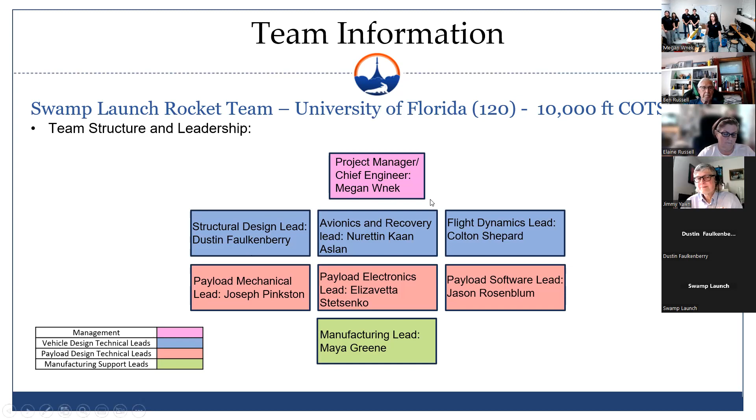So just an update before they start talking about where our team is at. We have, of course, submitted all of our progress reports and paid all our fees for competition and submitted the frequency allocation form. We have performed a test flight, and we are now completing our video conference. In terms of preparing for competition, we've coordinated our roster and our travel. We've secured our motor, and we're currently in the process of working on the technical report for submission.

So we're excited for all of that. And with that, I will pass it on to our technical leads to start talking through the project.

Hi, I'm Dustin, I'm the structural design lead for IREC. Just starting off with some basic dimensions and stats about the rocket. We chose to go with a single stage rocket for our design. It's a 6-inch diameter rocket, so it has an inner diameter of 6 inches and an outer of 6.14. We went with a 4-fin design. Our vehicle length is approximately 127 inches. Our vehicle weighs 42.2 pounds without the motor, and the vehicle weight with the motor is about 60 pounds.

For the airframe of the rocket, it's actually student research and designed carbon fiber that we made in-house. We made it using a 3-ply symmetric layup consisting of 2 3K biaxial carbon fiber sleeves with a middle ply of 12K unidirectional carbon fiber. We used Soller Composites 820 resin hardener system for our epoxy of choice. We conducted the whole thing on a polycarbonate mandrel, and then we wrapped the entire wet layup in a silicone PET tape in order to avoid sticking with the adhesive.

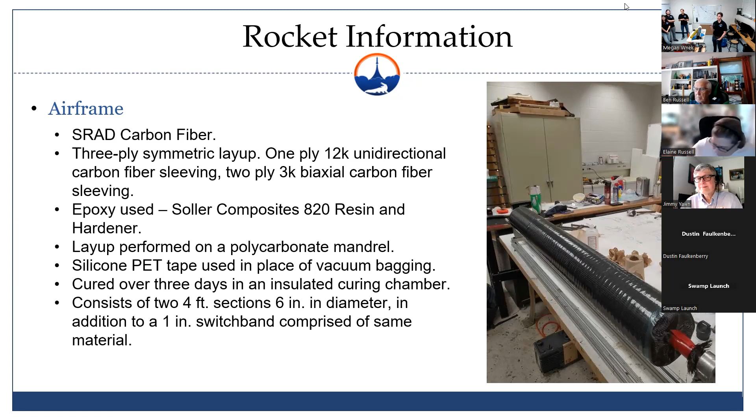For our nose cone, we just chose an off-the-shelf fiberglass nose cone. It has aluminum tips to improve flight stability by moving the CG a little forward and strengthening the nose cone. It is 6-inch diameter, we have it right over here. And it is a 5-to-1 von Karman, which we chose for ideal aerodynamic performance for flight regimes above 0.8 Mach.

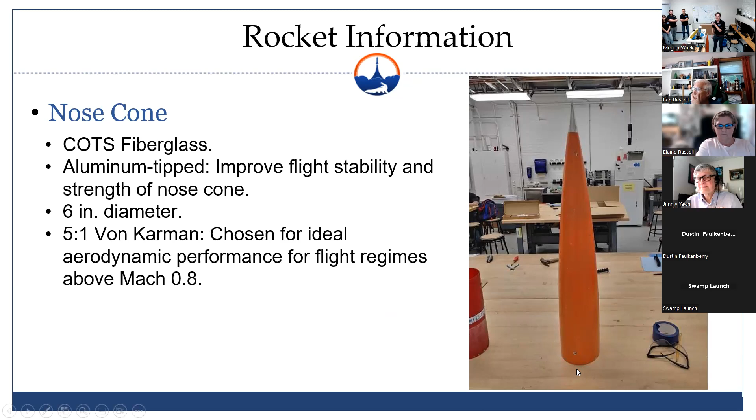And then we have the nose cone shoulder, which we have right here. This joins the nose cone and the forward airframe. It's also off-the-shelf fiberglass, 6-inch diameter, fits nicely inside of the nose cone and the forward airframe, 9 inches in length, and it's fastened via 4 nylon shear pins, which pass through the airframe.

Our avionics bay, which we have right over here and houses the avionics sled, joins the forward and aft airframes. It's also made of the same off-the-shelf fiberglass, 6 inches in diameter. It is 13 inches long and fastens via 3 plastic rivets to the forward airframe and to the aft airframe via 3 nylon shear pins.

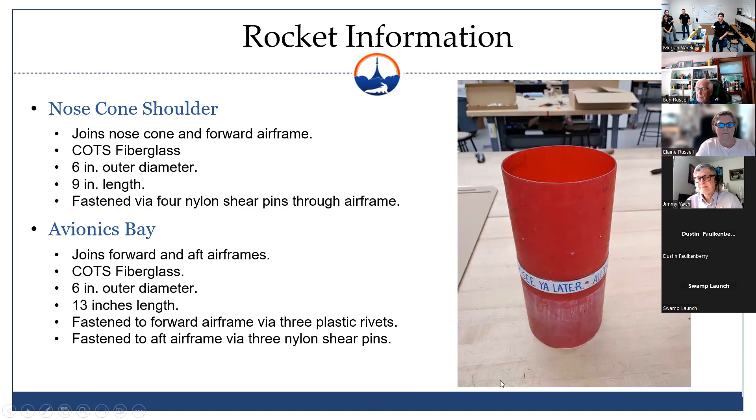Moving on to the forward bulkhead, which is situated right here inside of the previously mentioned nose cone shoulder. It seals the forward aft away from the nose cone. It serves as a point of attachment for the recovery harness via stainless steel eye bolts, which can be seen right there. It additionally serves as an attachment point for the GPS mount, which you can see right there on the slide. It is housed in the nose cone to avoid signal interference because the radio signals have issues passing through the carbon fiber airframe, so they need to sit inside of the nose cone to receive signals properly.

It is made of student research and design PVC, and we made it simply by turning it down on a manual lathe, boring out that center hole so that we could mount the GPS, which is a PET-G 3D printed part. We bored out the center hole and then parted it from the stock.

The avionics bay bulkheads seal between the avionics bay, keeping them from ejection gases. If you would like to hold that up so I can see it.

This seals the avionics bay from harmful ejection gases. It serves as the point of attachment for the recovery harness, once more via stainless steel eye bolts. It serves as a mount for the CO2 ejection system, which we'll elaborate more on later. It is student research and designed aluminum 6061, manufactured via turning down the size on a manual lathe, parting, and drilling the holes.

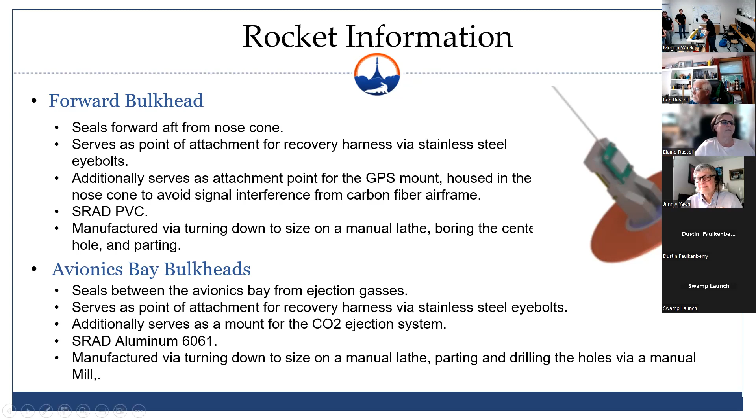And then our fins, which we have a couple of right here. These are student research and designed epoxy glass fins. We cut them ourselves on an abrasive water jet. We chose epoxy glass as our material of choice for its strength in both torsion and bending. It also has adequate strength to withstand impact on ground hit. We chose it over metal just for weight purposes because metal fins, whether aluminum or steel, would be much, much heavier than a composite fin, and overall improved stability as well.

We went with a 0.192 inch thickness for these fins, which was deemed adequate to withstand all flight loads, and it was cut from bulk sheet material, once more on a water jet. Four fins was chosen over a three-fin design for stability advantages.

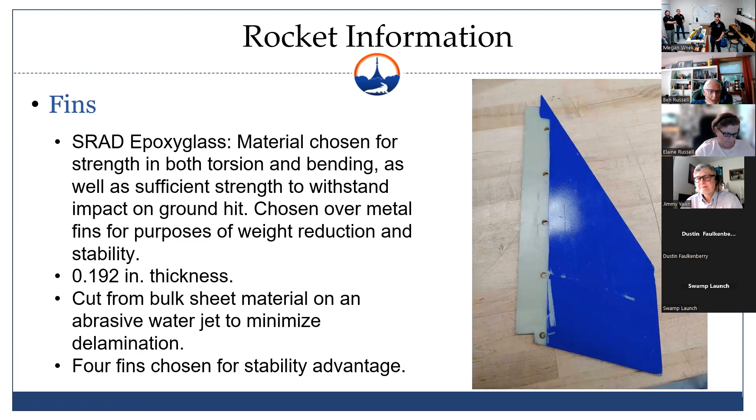All right, moving on to discuss the aft assembly, which was our initial concept for the design this year. Our main goal was to produce a design that could be easily disassembled and reassembled with no damage to the components. This is in contrast to a traditional epoxy aft, where everything is essentially secured during assembly, and once you have everything in place, nothing can really move.

It allows for easy design iteration post-assembly. If you need to change a part, you can. If you want to make any adjustments after the fact, you're not stuck with what you have. The components can be replaced in the event that they're damaged during launch or testing, and you can also reuse those components for a future project or for future vehicles.

The disadvantage that comes with that is higher manufacturing costs, because aluminum parts to be machined both cost more in terms of raw material and take more time to machine. There's also a potential weight disadvantage because you're going to have much, much more weight with this entire metal skeleton versus just wooden epoxy.

The fins are actually mounted via attachment to these two exterior fin brackets that you see here, that look just like this. You can see as they sit on the outside of the fin design, they are through the wall, so they pass through the fins and fasten via five alloy steel flathead screws. Each of the fins is also press fit into a radial slot in the centering rings, and then the brackets are fastened through the airframe to all of the centering rings once more via alloy steel fasteners.

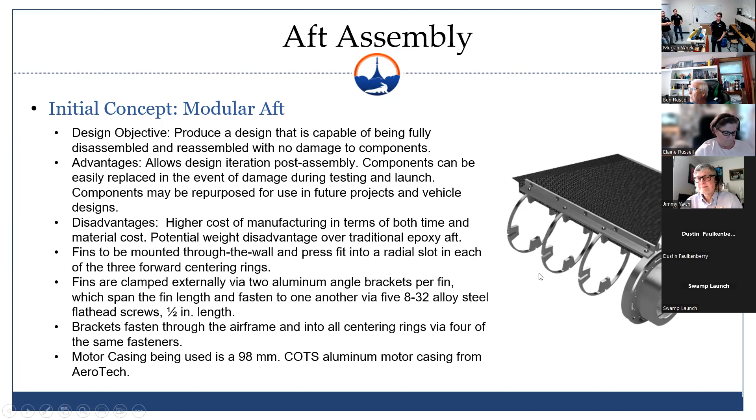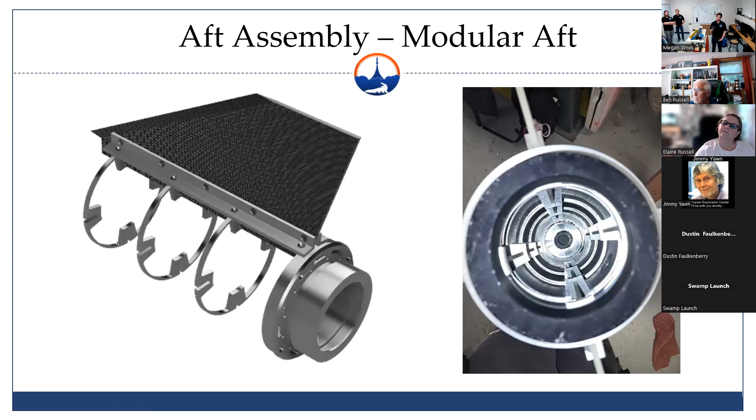The previously mentioned fin brackets are made of 6061 aluminum. Each bracket was machined on a CNC mill from a 13.5-inch bar stock, 1 by 1 inch. All the surfaces that were tangential to the airframe sat at an 8-degree angle from normal, so they had to be machined on a custom 3D printed fixture. All of the brackets came out to 13.25 inches after machining.

For the left brackets, there were simply 5 countersunk holes that allowed the left bracket to fasten to the right. The right had the threaded holes, which allowed it to be secured.

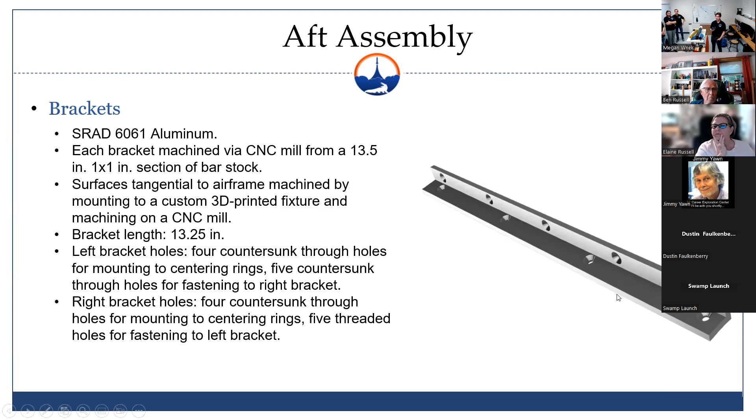The centering rings are Student Research and Design 6061 aluminum. They were manufactured by cutting bulk 1/4-inch thick plate on abrasive water jet to get the overall geometry, and then to make each of the exterior threaded holes, they were machined manually on a rotary chuck.

There are 4 centering rings in total. The aftmost one, which sits on the back and fastens to the thrust plate, differs from the other 3 in that it omits the fin slots in favor of 4 threaded holes.

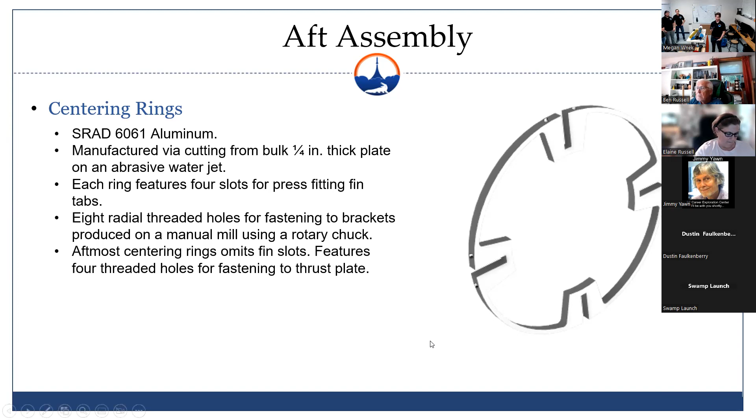The thrust plate and motor retainer subassembly was a Student Research and Designed in-house aluminum design consisting of the thrust plate, an off-the-shelf motor retainer from Aeropack, the 6061 aft centering rings, 12 stainless steel button head screws, and 4 stainless steel flathead screws, which were longer and fastened the aft centering ring. That is this subassembly that you see right here.

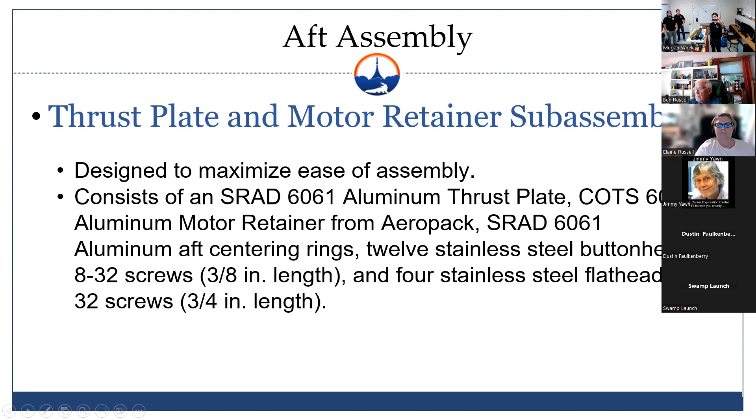For the thrust plate, we chose to make it once more out of 6061 aluminum. We cut it from a bulk 1/2-inch plate to get the overall geometry and then machined the detailed features on a CNC mill. It features a 6-inch diameter shoulder for mounting into the aft airframe.

The entire design slides very nicely into the back end of the rocket and then sits there. It features a recessed pocket to easily align the motor retainer, as can be seen right here, the motor retainer actually fits very cleanly into a pocket there, which makes assembly quite simple.

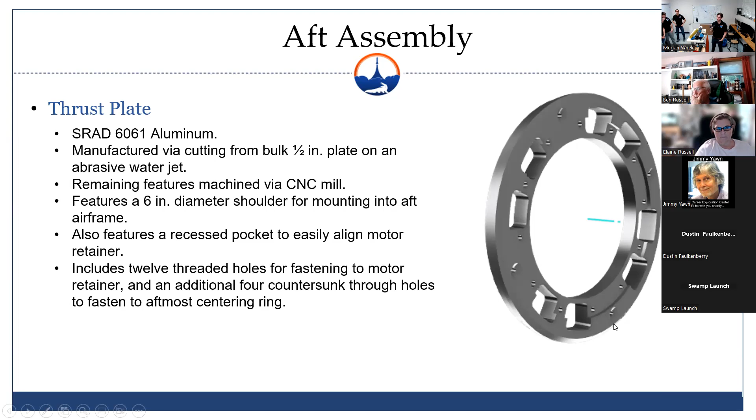It has 12 threaded holes for fastening the motor retainer to the thrust plate itself, an additional 4 to fasten the thrust plate to the aftmost centering ring.

Now, this entire aft concept that we were initially going to use for the competition vehicle was tested during test flight and experienced material failure. We are still investigating the potential modes of failure that occurred and developing a narrative to figure out exactly what happened. At the moment, though, we are choosing to rebuild our aft with a new concept, going with a traditional epoxy aft design.

The fins from the initial concept are reused because they didn't sustain any damage during the test launch. The aluminum brackets and centering rings are omitted in favor of epoxy glass rings, which we mounted via epoxy to the airframe and motor tube.

The aftmost centering ring is no longer aluminum. It is now made of 1/2-inch thick wood. And the epoxy fillets are used to mount the fins to the airframe in place of the existing metal brackets.

The design now features a motor tube, which our initial design did not have, that is 4.02 inches in outer diameter, made from G12 fiberglass. The thrust plate and motor retainer also did not sustain any damage during the test flight, and so those will be repurposed. I'm now going to pass it off to Colton, our flight dynamics lead.

I'm Colton, the flight dynamics lead. The motor we decided to choose was a commercial off-the-shelf Aerotech M2500 motor with an average thrust of 2,500 newtons, a total impulse of 10,240 newtons, and a burn time of 3.9 seconds.

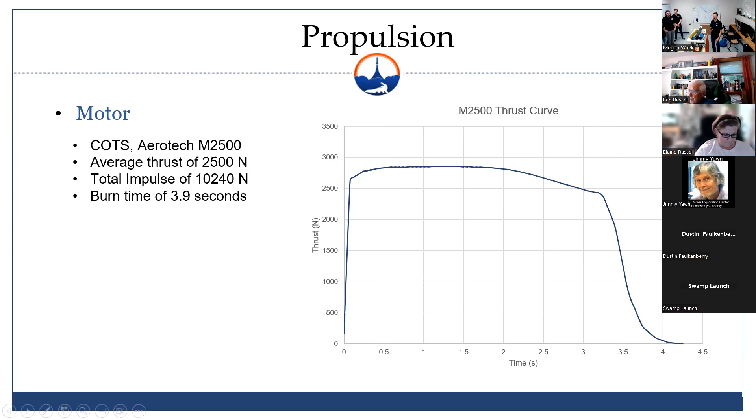We ran some flight simulations for the modular aft rocket design using the latest OpenRocket software that came out to an apogee of 10,180 feet, a velocity off rail of 104 feet per second, a thrust to weight ratio of 7.8, max velocity of 1,037 feet per second, a max acceleration of 335 feet per second squared, a static margin of 2.7, and using a ballast mass of 1.5. We have plots of position, velocity, and acceleration throughout the flight plotted for you.

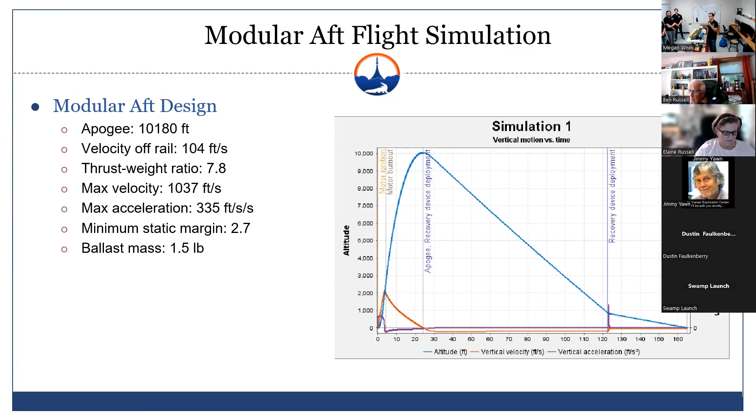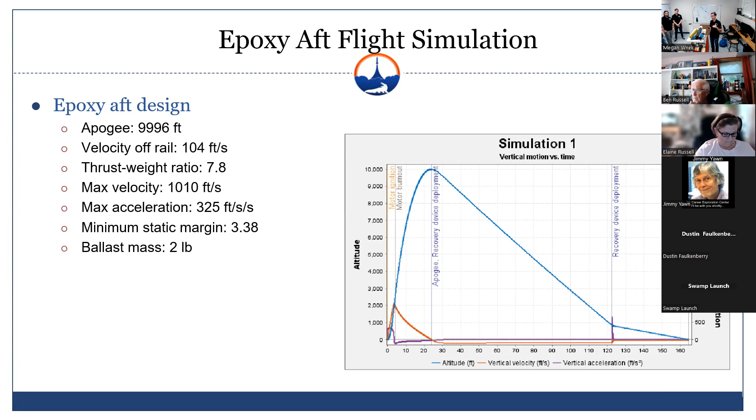Again, the position, velocity, and acceleration for the flight are pictured, and the next slide is a plot of the stability throughout the flight.

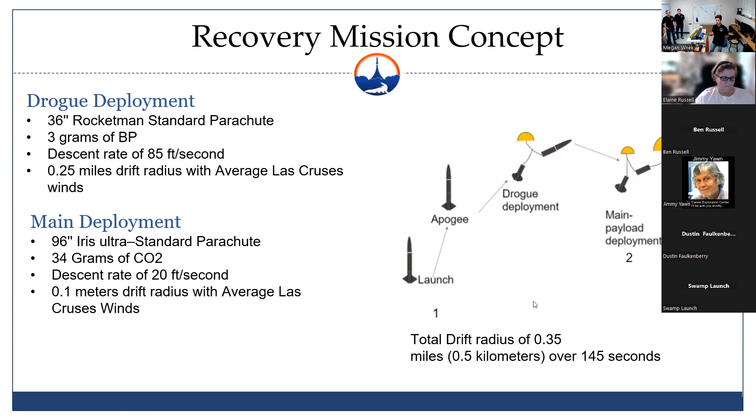The CO2 ejection system was student designed and researched, and the initial idea was found through looking at different off-the-shelf available CO2 ejection systems, and the system that we chose to build is...

All these components were machined out of bar stock aluminum 6061, and the CO2 ejection assembly is mounted on the avionics bay bulkheads, facing towards the forward section of the rocket since they deploy the main parachute and the payload.

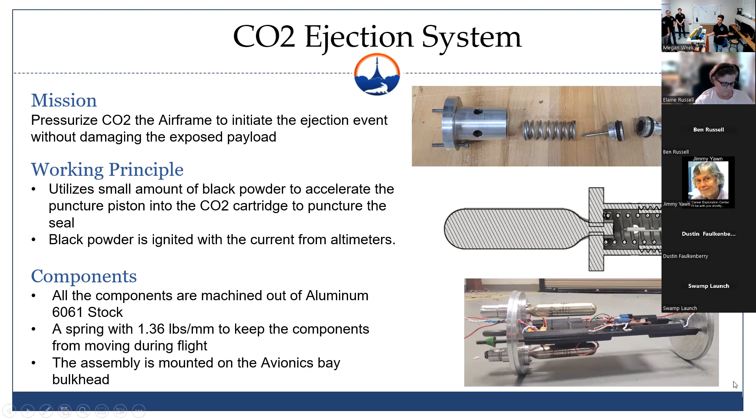The GPS that we're using to track our rocket after launch is a TeleGPS. It's located, like Dustin mentioned earlier, inside the fiberglass nose cone. It uses a 70 centimeter transmitter with 10 milliwatts of radio frequency output. We're going to be using 434.750 megahertz as our frequency. This GPS is powered by a 3.7 volt LiPo battery.

We receive the radio frequency from the GPS through a TeleDongle antenna, which connects to a computer and matches this frequency as the GPS. Using the manufacturer application provided to us, we can track the rocket and find its location on the map, and we can get the coordinates as well.

So far, before having our test launch, we've tested all the recovery events. First we tested the flight computers, where we tested functionality using the manufacturer's software, where we fired the drogue charge and the main charge, but instead of having black powder charges at the end, we connected LED lights to see if they were going to light up, and everything worked out.

After that, we tested the CO2 ejection system outside of the rocket before we actually put it together, to see if it was going to puncture the cartridges reliably and how much black powder it needed.

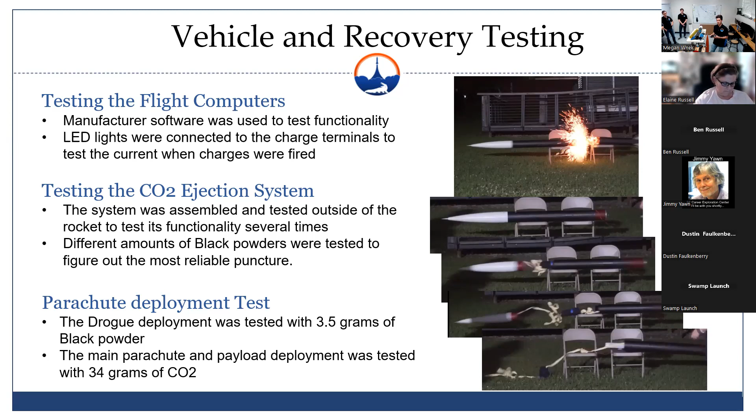Hi, I'm Jason Rosenblum, the payload software lead. Our payload this year is an autonomous quadcopter, which will be aerially deployed after the main ejection. Its goal is to take images of the launch vehicle's landing site after it's landed.

It's powered by a 4,000 milliamp hour LiPo battery. Its main sensors are a GPS, inertial measurement unit, barometer, and an ultrasonic sensor. It communicates with a ground station using an XBee Pro S3B.

It's made out of student researched and designed carbon fiber custom layups for both the frame and motor arms. The payload has 2 GPSs: one on the quadcopter itself, a U-Blox Max M8Q, which uses the XBee Pro S3B 900 megahertz frequency to send coordinates back to the ground station.

And the parachute has its own GPS, which is an off-the-shelf Big Red Bee 900 megahertz unit.

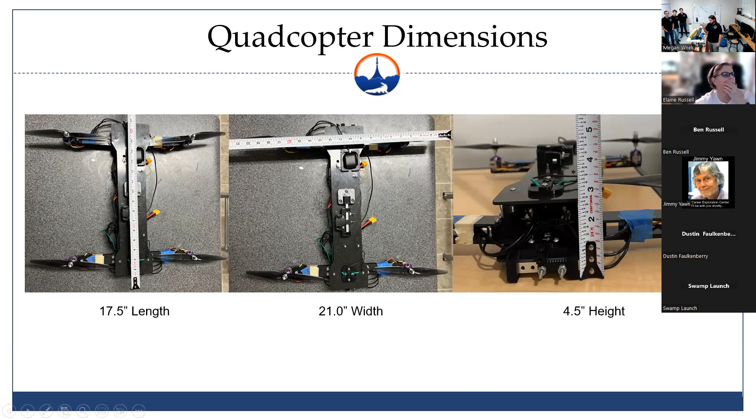As Jason mentioned, the main structural components for the quadcopter are the top and bottom frame and the arms that connect the propeller motors to the quadcopter frame. These components are all student researched and designed carbon fiber.

We used a 12-ply prepreg symmetric layup, which was vacuum bagged and cured in an oven over a 4-hour cycle. The components were then cut from this layup on an Omax water jet. These are pictures of the components when they came off the water jet.

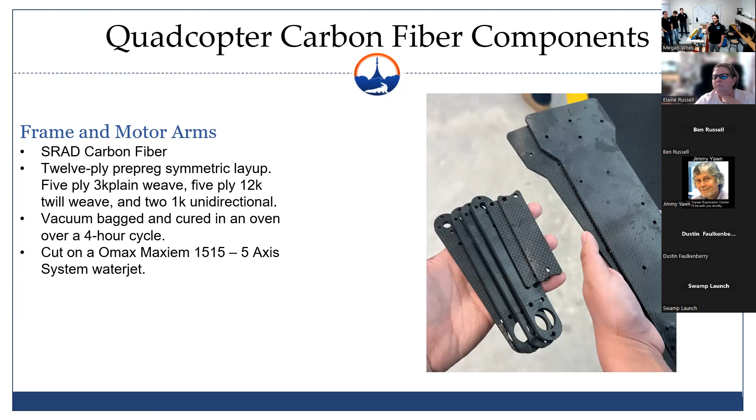For the quadcopter mechanical components, as mentioned before, the arms are able to be folded inwards for flight configuration. This happens through the unfolding mechanisms located at the 4 corners of the quadcopter frame, which connect the propeller arm motors to the actual quadcopter frame.

These unfolding mechanisms each have a 180-degree torsion spring, a pin-plunger locking mechanism, 2 nylon thrust bearings to help carry the load to the frame itself, and a pivot housing, pin chamber, and hard stop, all of which are 3D printed using PETG filament.

The arms are able to be folded inwards using the pin-plunger system, so when you pull the pin, the arm can fold inwards, and after releasing the arms during deployment, they snap open, allowing the drone to begin its flight configuration.

We also have, on either end of the quadcopter, the container deployment rack and pinion system. These are located at both ends of the quadcopter and allow it to be deployed from the container, which will be discussed later in the retention system section. Each has a DC motor driven rack and pinion system, with an aluminum beam to help carry the load, a steel pinion, and an acetal rack.

When these rack and pinion systems are actuated, they experience a 2-pound load. These were tested and were able to open and actuate under 8-pound loading, and they were also utilized during the test flight.

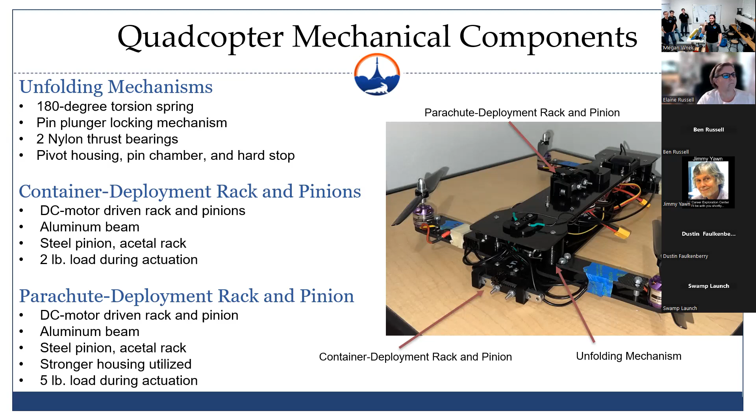Additionally, we have an ultrasonic sensor mounted externally with line of sight to the ground that can help detect landing of the drone, and an active buzzer to confirm proper working of all the electronics.

We have an XBee RF module which will communicate with a ground station and send back coordinates of the drone. We also have 3 DC motors for deployment, which are external, and an external button to arm all the electronics from outside.

The microprocessor we chose was the Raspberry Pi Zero 2W because of its small form factor and compatibility with the project. We also have an electronic speed controller used to control 4 brushless 1300 kV motors, chosen because they could provide the drone with a 2-to-1 thrust to weight ratio, needed for it to be stable and sustain itself during flight.

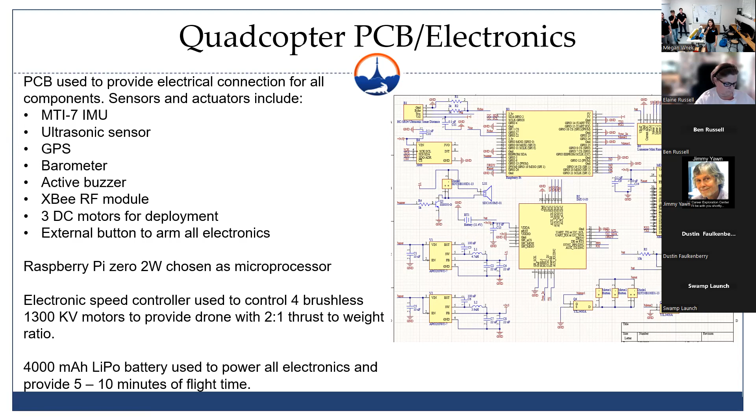At an altitude of 600 feet, the quadcopter will be deployed from the container and descend under its 12-inch parachute. During this time, the quadcopter will run system checks to ensure all software is operating nominally. Once we have given the manual go-ahead, the quadcopter will release from its 12-inch parachute and begin its flight operations.

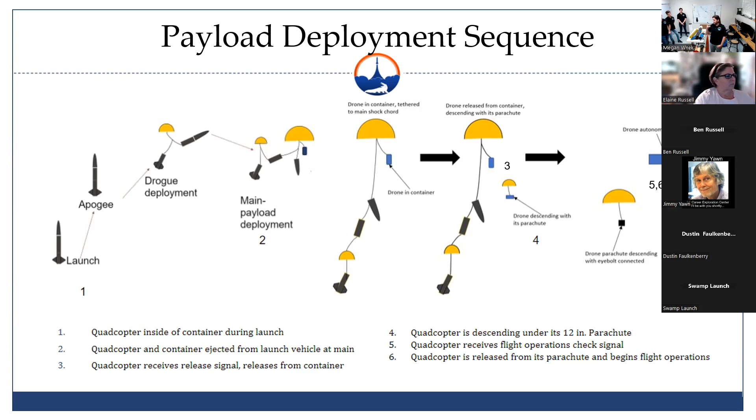This is a flow chart of the steps the software goes through during flight. First, once the payload is armed on the launch pad, the IMU will wait for acceleration to determine launch. Once launch is detected, using both simulation timing and barometer data, it will look for the main ejection. Once that ejection is detected, it will use barometer and GPS altitudes to release from the container at approximately 600 to 700 feet after the main ejection, which occurs at 800 feet.

Once it releases from the container by actuating the two DC motors on both ends of the drone, it will descend under a parachute first. While it's descending under that parachute, the payload will check the sensors to ensure they're within proper limits.

Such as GPS limits, altitude limits, and making sure the acceleration and velocity are within expected bounds. Once it's completed those checks, the team from a ground station will send a command giving it the go-ahead to release, just in case the payload drifts somewhere unsafe to release from the parachute. It will not release on its own. Once given that command, it will wait for an appropriate altitude, which is a maximum 400 feet limit to release from the parachute.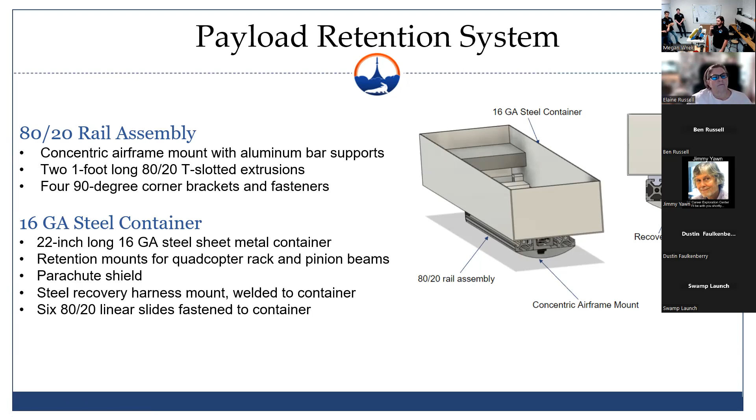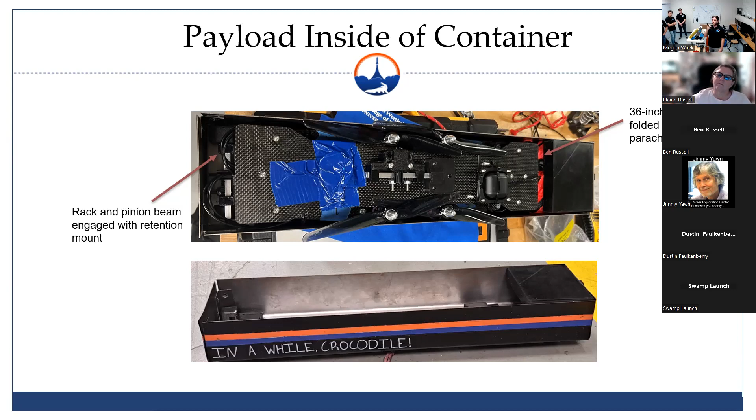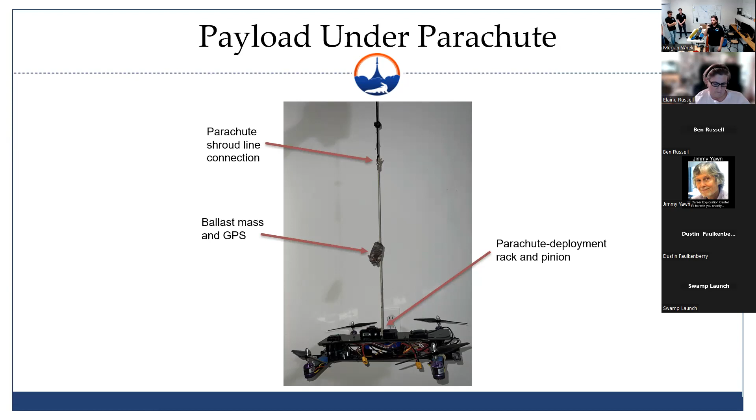We have the parachute shroud line connection, which connects to a shock cord. This shock cord has a ballast mass and the GPS attached to the parachute for tracking. That shock cord mounts to the parachute deployment rack and pinion on top of the quadcopter top frame. When the deployment rack and pinion is actuated, it allows the shock cord to disengage from the quadcopter, and the quadcopter is able to begin its flight.

The next few tests are all related to the release from the container: rack and pinion testing, unfolding mechanism testing, pin plunger locking testing, and retention system testing. These proved that the arms could lock properly and securely, and also that it could release from the container, with the DC motors actuating to release it.

We also, with the avionics and recovery lead, tested the CO2 ejection, which proved that the sensors would remain undamaged during ejection.

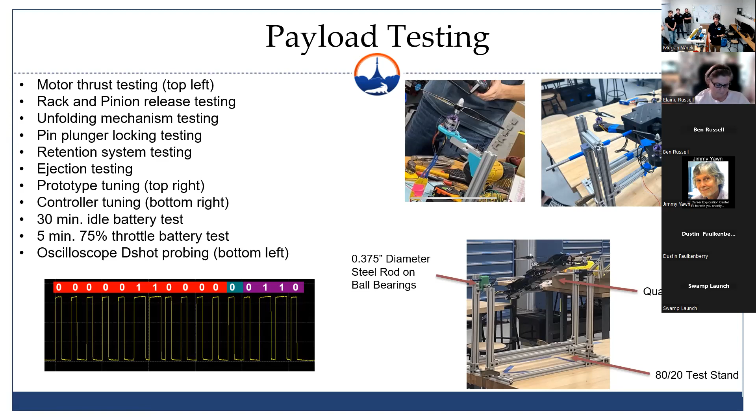The bottom left shows an oscilloscope probing of the Raspberry Pi as it sends a D-shot command to the electronic speed controller. We're communicating with the speed controller using a method called D-shot, which uses a packet of high and low signals shown in the bottom left, and that was our custom implementation testing.

As was alluded to previously, when we conducted our test flight, the modular aft system did experience catastrophic material failure. The time of failure during the launch is uncertain, though it's believed to have occurred shortly after coming off the rail. It's currently believed that the force of the motor induced an aerodynamic load on the fins that caused shearing.

This shearing occurred in the centering rings due to inadequate reinforcement, and one of the fins failed in this way, came apart from the structure, resulting in bending of the brackets. There was limited deformation of the brackets as a whole; out of the 4 sets of brackets, 2 are almost entirely undamaged.

There was significant bending deformation of the centering rings, as well as shearing in several locations, but no deformation in any of the fasteners or the thrust plate subassembly. The material failure of the airframe appeared to occur primarily in locations where the centering rings also failed, suggesting it was the result of cascading failure due to the initial shearing of the centering rings, and then abnormal loading from the fins being in an awkward configuration.

The front end of the airframe also experienced some zippering, which at this time we're not sure of the exact reason for. One of the fins actually experienced some buckling with the airframe, which we're still developing a theory of failure for.

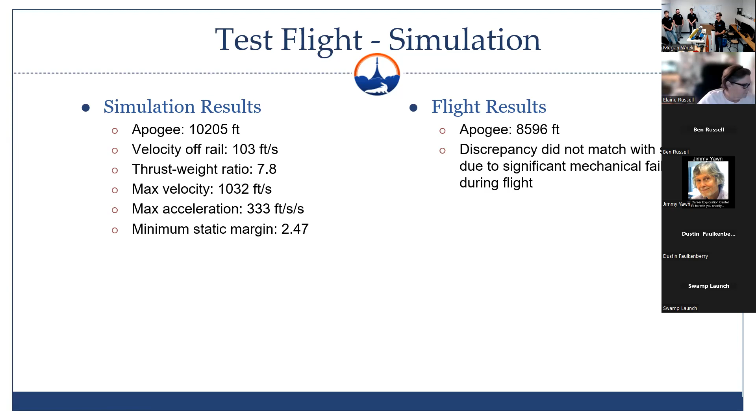The quadcopter and its retention system were flown on the test flight. The quadcopter was flown up until the point of release from its parachute, as we were not ready to test the autonomous flight controller yet. However, the quadcopter and all its sensors were operational throughout flight, and the retention system was utilized.

We had a couple of 3D printed components fail throughout the flight. The exact reason isn't entirely clear yet, but we believe for the unfolding mechanisms, a couple of them sheared, possibly due to the faster than normal landing the quadcopter experienced.

Sensor data was recorded. However, we received an erroneous IMU acceleration reading a couple minutes prior to launch. This caused the software to believe it was already in its launch state when it was still on the pad, so the data we recorded was from while it was still on the pad instead of throughout the flight. However, this issue of removing outliers from our IMU detection system has now been accounted for.

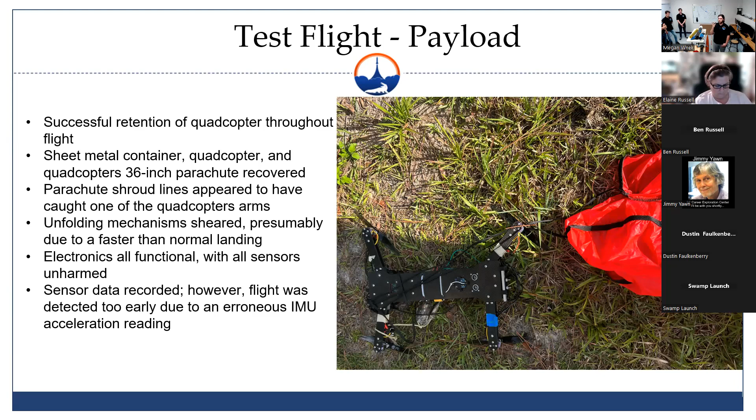At the test flight, right before takeoff, we lost GPS data from the GPS. At apogee, the altimeters read an altitude of 8,596 feet, and they fired the drogue charges successfully, deploying the drogue parachute.

At the same time, it's theorized that due to the drogue deployment, the tugging force on the shock cords accelerated the payload, causing it to hit the nose cone and separate it prematurely, deploying the main parachute and the payload well before 800 feet and near apogee.

The CO2 ejection system's black powder charges were fired at the main altitude of 800 feet. However, these charges were not enough to puncture the cartridges. We also learned that one of the biggest concerns with the system was that due to acceleration and vibrations throughout the flight, the canisters could puncture prematurely, but they didn't puncture at all.

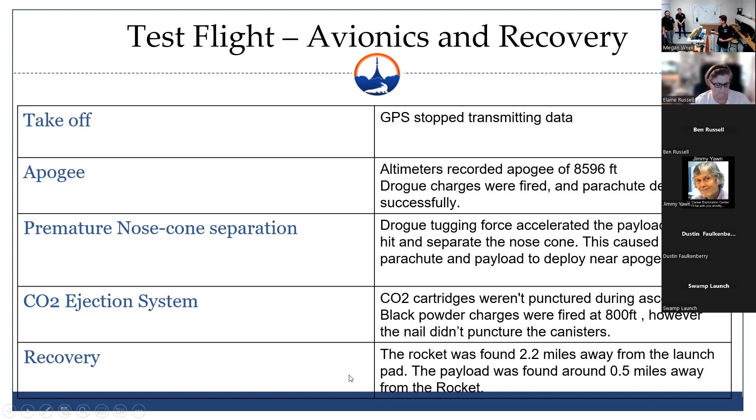Before competition, there's stuff we need to work on, one being the CO2 ejection system. We think that even though the amount of black powder was enough to puncture the canister on the ground, it wasn't sufficient in flight because the flight conditions may have caused the black powder to splatter within its containing volume, preventing it from burning all at once.

So we're going to store the black powder in a smaller volume, packed tighter so it doesn't move around and burns all at once when it's supposed to. The O-rings inside the CO2 ejection system will be upgraded to ones resistant to temperature and corrosion, and more puncture tests on fresh canisters will be done to ensure reliability.

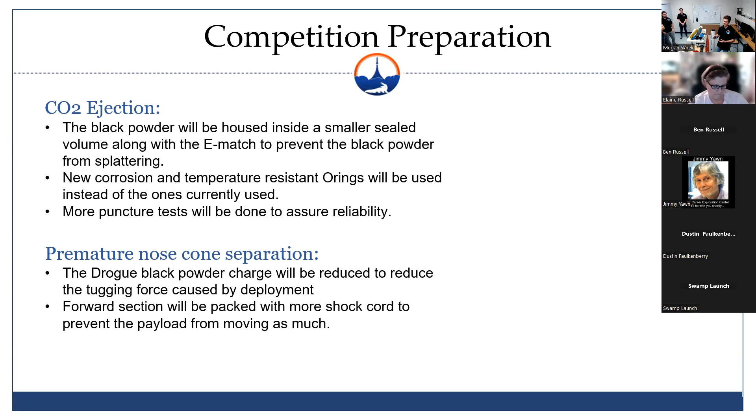For the premature nose cone separation, we're going to decrease the drogue black powder charge to reduce the tugging force from deployment, and pack more shock cord for the forward section to make sure the payload doesn't move around as much during ejection events.

For the quadcopter, the next steps are to complete the quadcopter tuning on our test stand. Once that's complete, we'll begin free flying the quadcopter and finish tuning in free flight, conduct extensive flight testing in different environments to ensure stability, and complete release testing from the parachute to confirm it can recover from the free fall it will experience.

In terms of major structural components, the biggest preparation needed before the competition is the full rebuild of the aft following the previously mentioned epoxy aft concept. An additional airframe layup is currently being completed to replace the damaged aft. Manufacture of new centering rings made out of epoxy glass and wood is currently being conducted, and those will be secured to the new airframe once it's completed. The fins will be modified as necessary to accommodate the revised design, and all of the fasteners in the thrust plate sub-assembly will be replaced with fasteners more appropriate for fastening to the new wood centering ring.

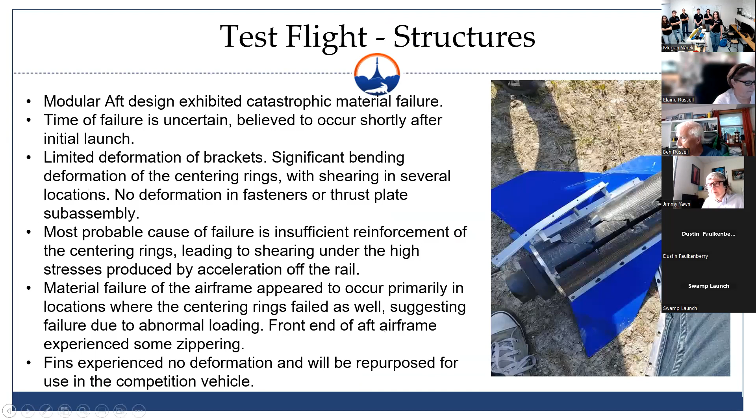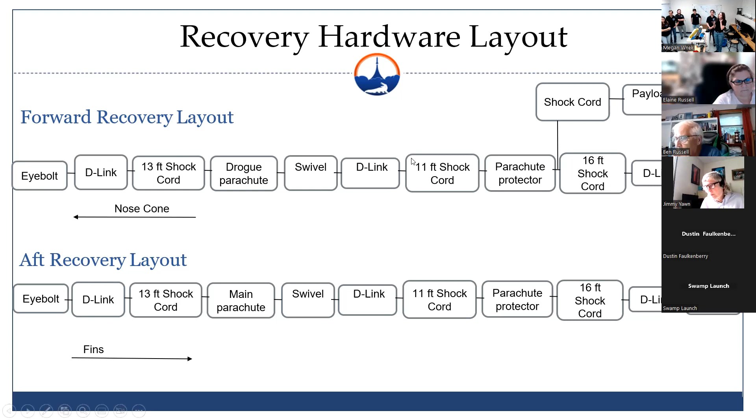Okay, so let's talk about the aft end, the motor mounts and the fins. If I understand things correctly, we're going back to a more traditional system where we have through-the-body-tube to the motor mount securing the fins, and big fillets on the fins and that sort of stuff. Is that correct? Yes, that is correct.

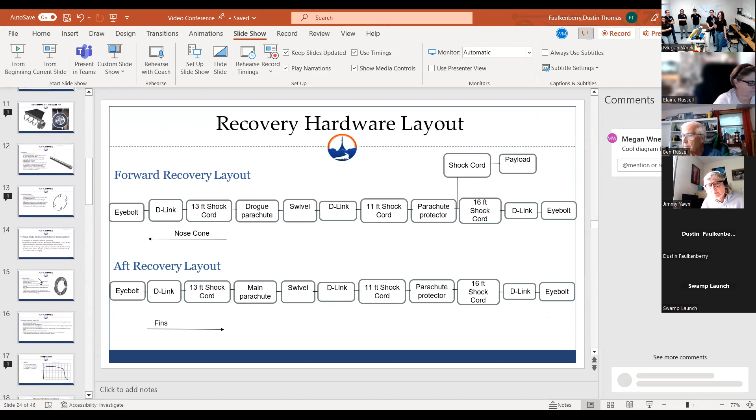Okay, lesson learned. Yes, we plan to discuss improvements we would like to make to the modular aft system in our technical report and talk about that system more, but it's going to require a bit of redesign, and in favor of attending competition, we decided to go with a more traditional design and focus on redesigning something for the future, farther in the future instead.

I think that's a very good idea, and I've seen designs like that work, but they have to be pretty hefty. You have to look at the motor you chose, the M2500 does kick pretty hard. Yes, we learned that too at the test flight, found out on that end of it. So let me see my notes.

You answered all the questions about the test flight. Are you going to try another test flight before the contest, or is that too tight? We will not be able to do another test flight before the contest. We will be doing ejection testing again to ensure separation, but in terms of a full-on test flight, we'll not be completing another one of those.

Have you given any consideration to not using your homegrown CO2 cartridge ejection system and just buying one? Not yet, we're planning on doing more testing on it first, like we discussed, to test out some different methods to ensure the puncture will be more reliable. If we're not able to confirm that, and it really is a sort of hazard, then we would consider something like that.